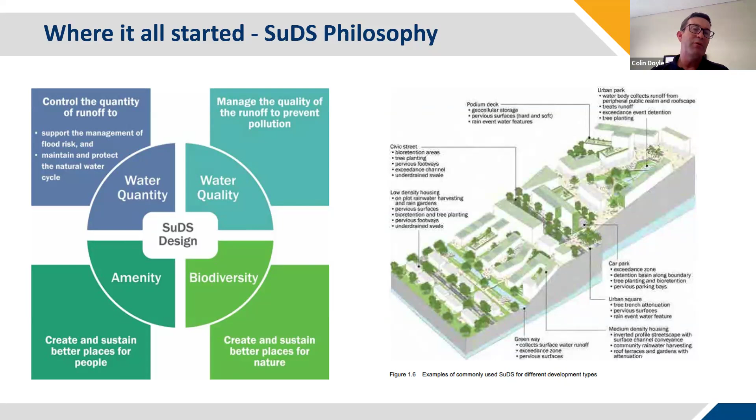With regard to Roadstone, basically we were in the concrete and stone business and tar macadam and lots of different basic building products. When it comes to stormwater products, which is something we have moved into since our sister company Hydro International came on board, the relevant sectors we are involved in really are the public sector with regard to schools, universities and social housing. And we've recently put a stormwater treatment product into UCD with BAM.

In residential housing developments, we see Hydro-Brakes and flow management products are very common. Private commercial, be they warehouses or retail parks, shopping centres and car parks, with regard to large scale attenuation and stormwater flow management products. We're doing a bit with regard to motorways and link roads and infrastructure, providing flow management products and Hydro-Brakes into a lot of infrastructure projects, and we see that increasing over the next couple of years as we get more and more into the market.

For Irish Rail, we have specified and priced our flow water treatment product into Irish Rail there recently. So we'll be hoping that comes and becomes a live project in the coming weeks. And water utilities as well, with regard to treatment works and water networks, etc. That's an area that we're beginning to move in.

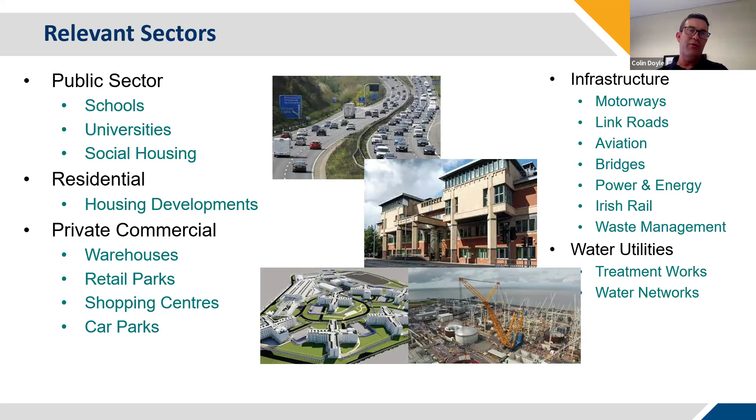And Brian will have a chat to you in the end about an upcoming seminar we'll have before Christmas, which will begin to deal with Roadstone's and Hydro's solution to stormwater management issues, as well as combined sewer overflows, flooding issues, etc. So that's what we'll be moving on to at year end with regard to our Christmas seminar.

So where Roadstone have been is that for the last 25 years, we've been in the permeable pavements business, be it permeable paving itself, or in the Duraflow permeable tarmacadam. We have done a lot of work with regard to permeable no fines concrete, mostly as an underlay material underneath Duraflow or underneath permeable paving, to increase the structural viability of the pavement.

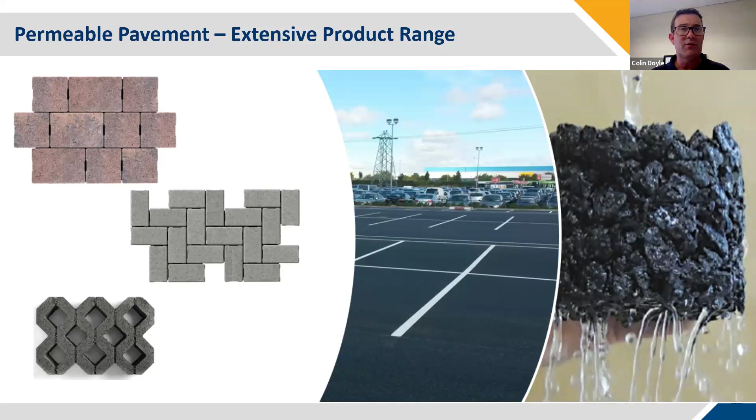So we have been involved in design of projects, and what we're looking at there is the car parking in the airport. That was a Duraflow product in the car parking spaces, where the standard driveways were a standard SMA product, stone mastic asphalt for hard wearing, but the actual parking spaces were themselves a Duraflow permeable tarmacadam product, and all the water is recycled for use in the airport. So there's a circular use of the water as it goes through.

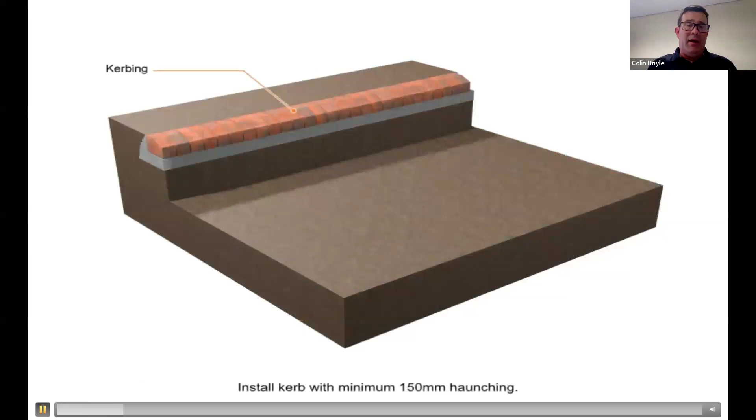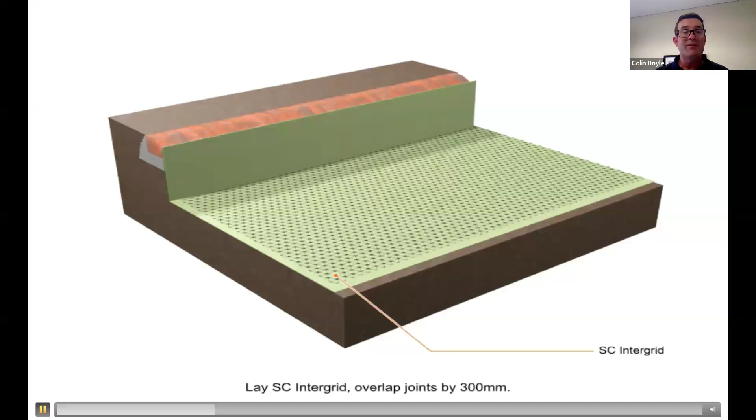So regarding permeable paving, we've been doing design permeable paving offerings for the last 20 years. Again, it's a very simple design. You excavate out the subgrade, you put in your curbing, then you put what we call an Inbitex geotextile on the bottom that provides a certain amount of treatment if water is going to ground. We have an SC Intergrid for flexural reinforcement within the stone body at the bottom, and this minimizes the depth you need to go to in order to get the support you need for the paving. So it minimizes dig, etc.

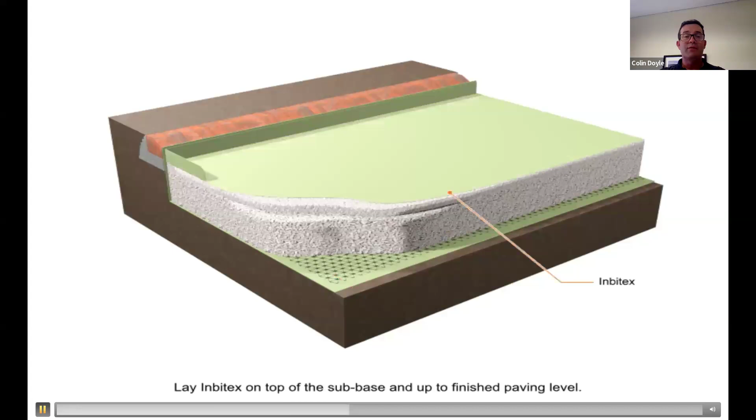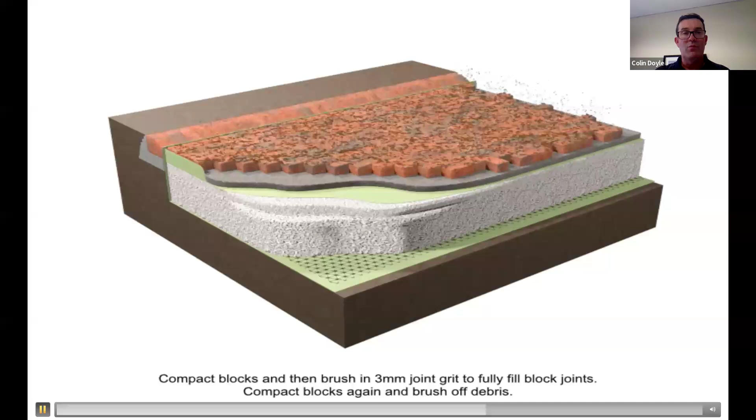Again, crushed no fines stone is in place, another layer of Inbitex, a laying grit, and then the paving themselves. So this has been designed and is becoming fairly much commonplace with regard to dealing with stormwater events with permeable paving. It can either go to ground or go for attenuation and delayed discharge, and then that offers our Hydro attenuation system, which bolts on to our permeable paving offering.

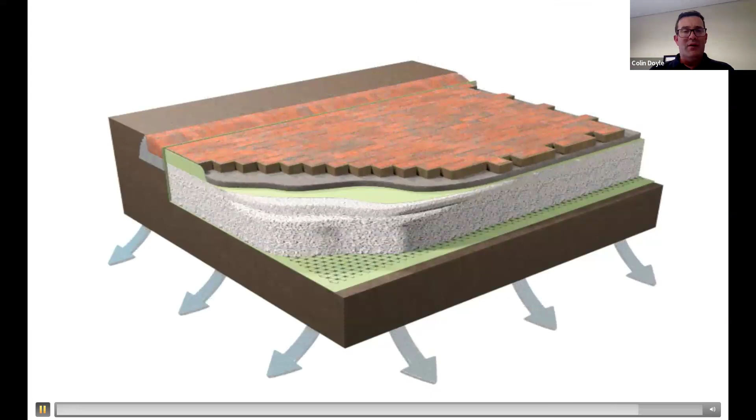But very little of our permeable paving is for ingress to ground. I'd say about 5% of what we do is ingress to ground. The rest is left for attenuation and delayed discharge. So we see just the general build-up. You can integrate rainwater harvesting into the systems as well, and then you can take roof water into the system as well.

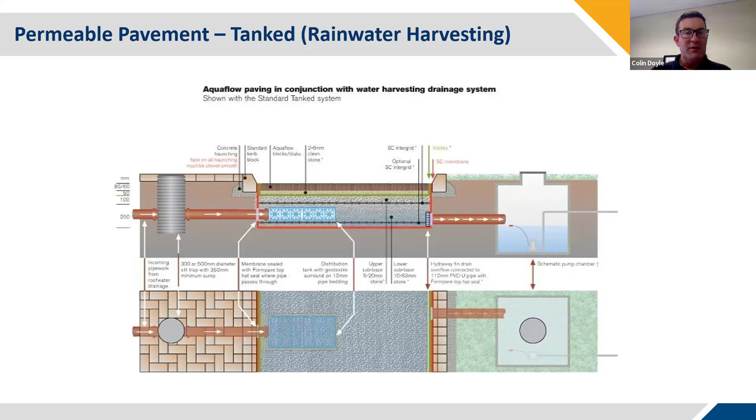Again, in Roadstone, we're a big believer in proper design, and we have services in place for design of all our systems, just to make sure that they work properly and that we minimize the amount of ground excavated and the amount of virgin material used in the products. So that's our permeable paving offering. I'm just going to hand you over to Phil, and Phil is going to talk through Hydro International and how they operate in the UK and here in Ireland over the last decades.

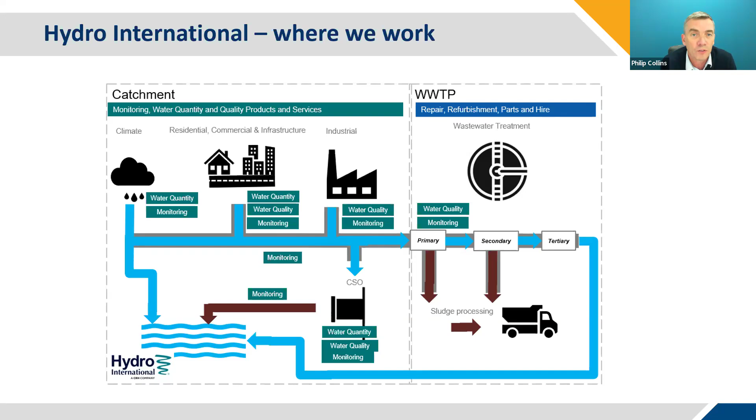Similarly, we apply the same engineering principles with regard to using hydrodynamic vortex separation at inlet works as we do for treating stormwater. And as Colin talked about, we have a rich heritage in dealing with CSOs, predominantly around screening of CSOs. So we have a range of technologies that we'll be talking about later this year. But we match the quantity aspect of controlling CSOs using our vortex technology. Next slide, please, Brian. So the solutions that we offer are fundamentally based on 3 core capabilities: slowing water down, taking things out of water, and understanding the water environment.

And the core 6 application areas that Brian will talk to in regard to the products relate to flood protection, stormwater management today. As I said, we're looking at having a session later in the year or before the year end around combined sewer treatment and flooding.

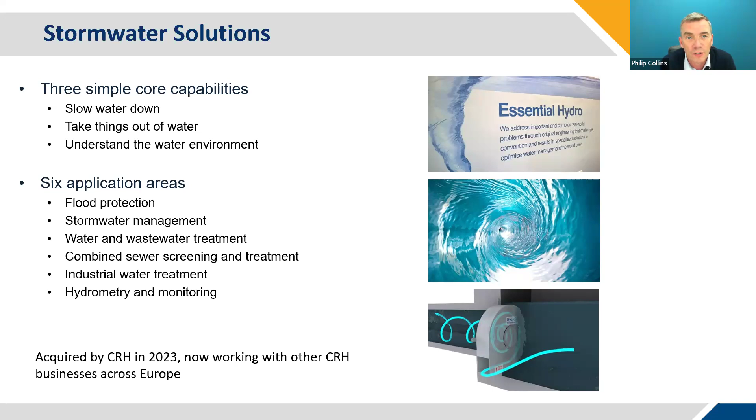What's really interesting for us in terms of the collaboration and partnership with Roadstone is bringing a holistic approach to the stormwater market in Ireland in terms of both quantity and quality, and we're looking to evolve that into how it relates to CSOs, and we'll talk more to that later in the year. So I'll hand over to Brian now, and he'll take you through the products, the stormwater products, in more detail.

Okay, thanks, Phil. So as the guys have said, the acquisition of Hydro is a great fit for CRH and for Roadstone. It's a good tie-in and follow-on from the permeable paving solutions that Roadstone's been offering for the last 20 years, as Colin has gone through. Obviously, with extreme weather and flood events becoming all too common a news story, planning conditions are becoming very onerous, with stricter water discharge conditions being applied.

So we're delighted to have the opportunity to be involved in designing and supplying solutions, working in conjunction with Hydro, design engineers, and of course on-site contractors, in an effort to reduce and hopefully eliminate the negative effects of these events. So I'll just go through, there's 2 kind of areas we'll cover.

Stormwater attenuation is the first one. That's broken up into flow control, where we look at the Hydro-Brake Optimum and the Hydro-Brake Flood. Then we'll cover attenuation and infiltration, so 2 systems there in terms of the crate system and arch or tunnel system. And then the second area is stormwater treatment, so 3 solutions there: the Downstream Defender, Up-Flo Filter, and the biofilter.

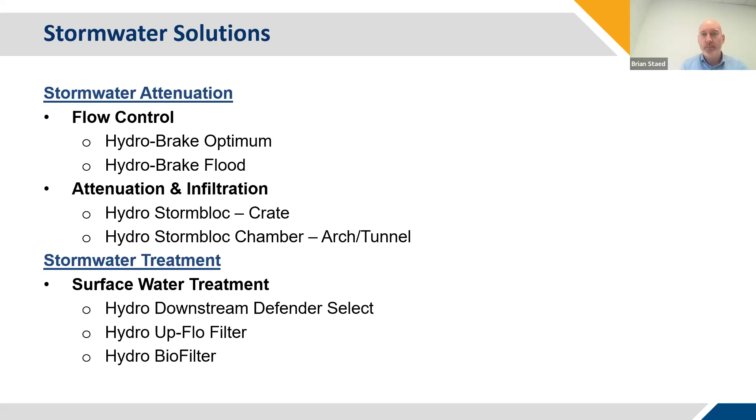So as Phil has said, Hydro have been around for over 40 years. They developed the UK's first vortex flow control device. It's the most widely specified flow control in the market. So the basics of it: a Hydro-Brake controls the flow of water into the sewer or watercourse, replacing old inefficient solutions such as orifice plates, restricting the flows downstream at agreed rates.

It then allows the slow release of temporarily backed up water at the same restricted rate, relieving pressure on sewer systems and reducing flood effects. The Hydro-Brake Optimum is adjustable by plus or minus 20%, so it's future-proofed for any change, maybe in planning conditions or design conditions. So it can be adjusted without having to replace the device.

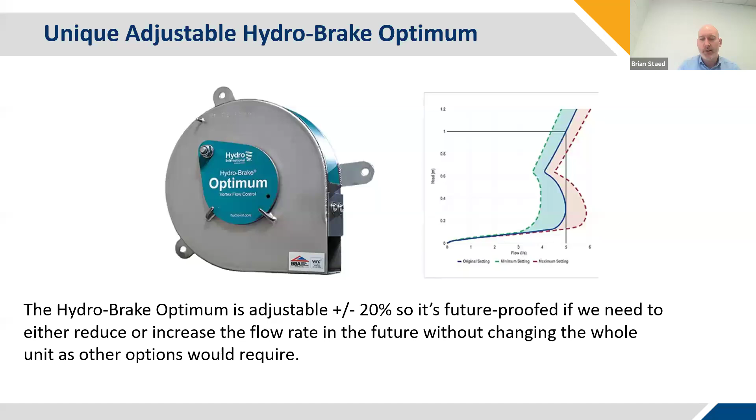The schematic there just demonstrates the flow of water through the unit. The characteristics of it: they can be designed up to a maximum flow of 550 litres per second, a max head of 4 meters, and an approximate storage area of 275 hectares. Now, those figures are based on an average of 2 litres per second per hectare.

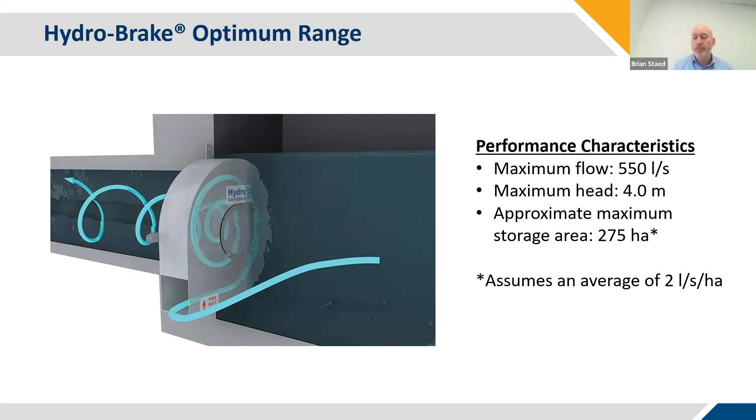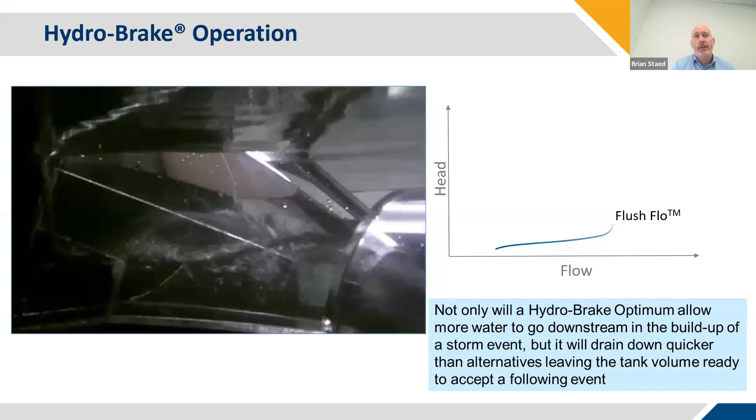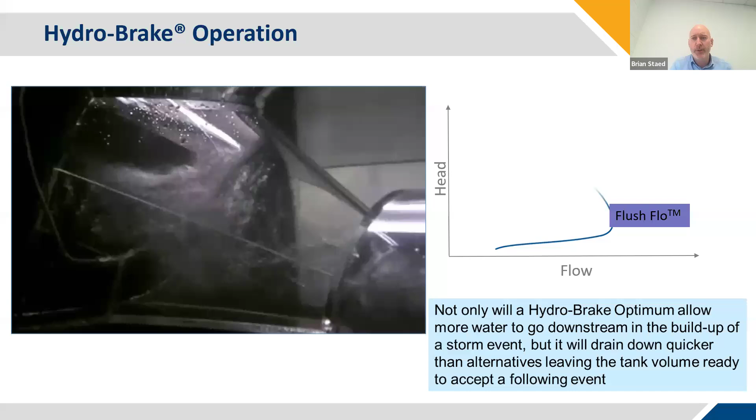So this video clip, while many of you would be used to seeing a Hydro-Brake, you may not have seen the water flow in action. So this is a sort of a transparent test unit. It shows what happens as the head of water increases in the chamber. The Hydro-Brake pulls air from downstream to create a core of air through the unit. That in turn restricts the flow going downstream. The core of air you see there is directly equivalent to the area of water that can't flow downstream.

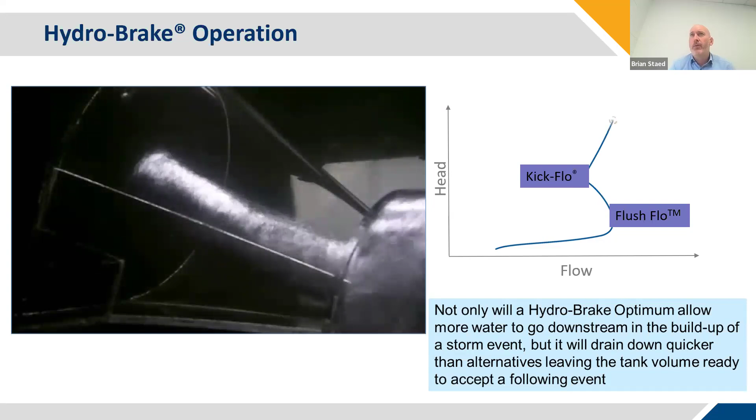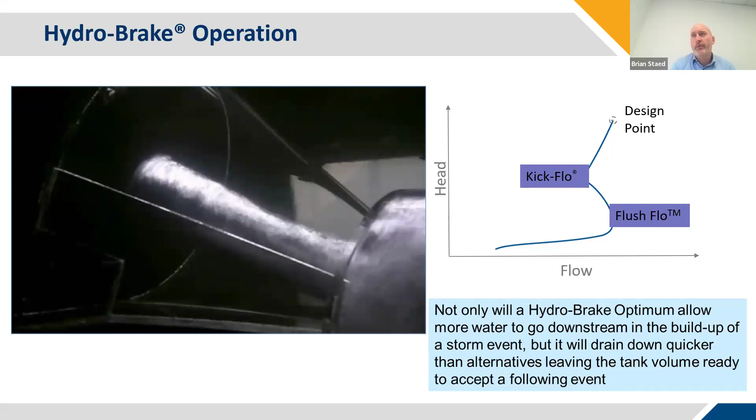And then when the storm passes, the water level drops and the unit again becomes just a large open orifice. And because the device isn't physically closed down, it can get more water off site during the early stages of the storm. You can see the schematic of the flow versus the head graph there. And it also drains down quicker, leaving the tank volume ready to accept another follow-on event.

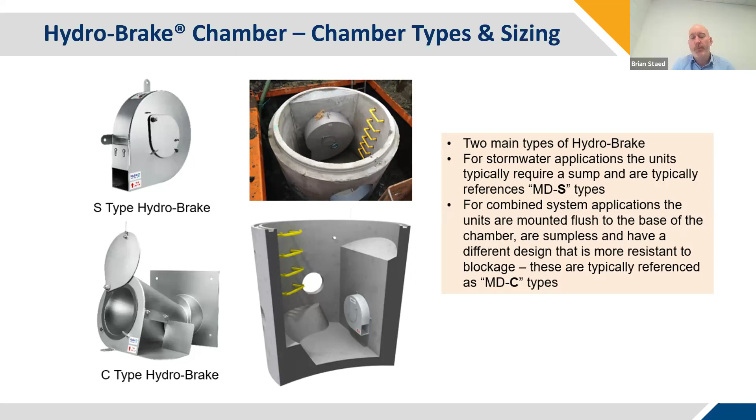That's just the Hydro-Brakes in situ. There's two types. The most typical one is the S-type Hydro-Brake. It requires a sump in the manhole. The other type is a C-type, which is a combined unit, which would be both sewer and stormwater, and it doesn't require a sump. And the design of that just prevents blockages.

So a larger version of that is the Hydro-Brake Flood. The Hydro-Brake Flood control provides consistent, reliable, large-scale flood protection at watercourse level, preventing costly damage and disruption to people, businesses, and essential infrastructure and services. It's typically installed in or adjacent to a designated attenuation area, such as an embanked field or whatever is designed as part of the flood relief scheme.

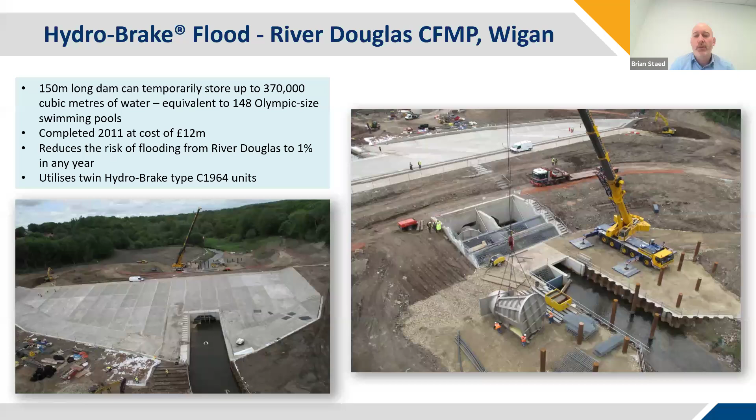Another similar project over there was in Glasgow, where they suffered years of flooding in and around the city, and once this project was put in place, it was a great success to both businesses and residents in the area, as it prevented further damage and even loss of life.

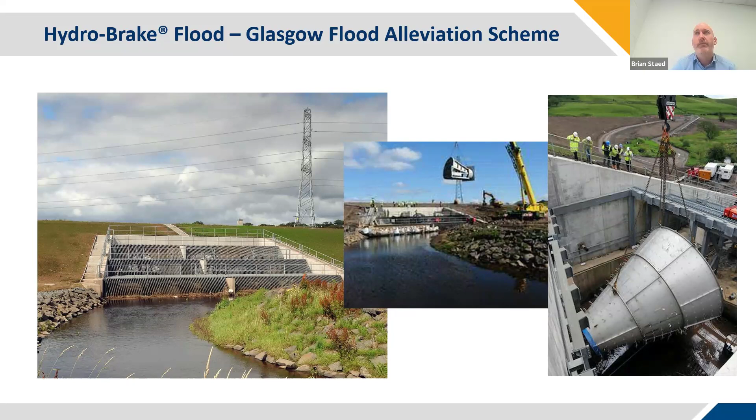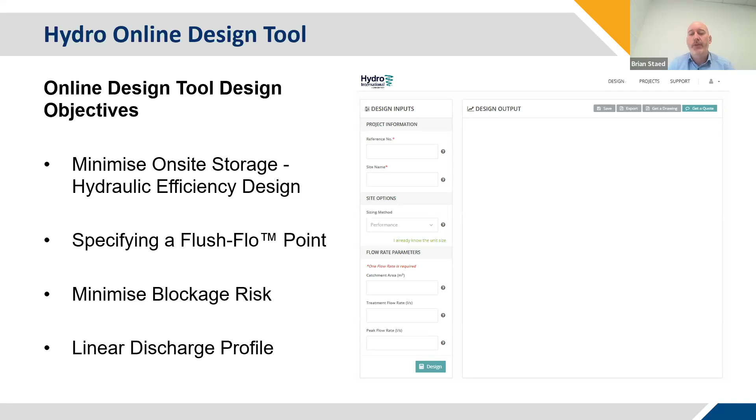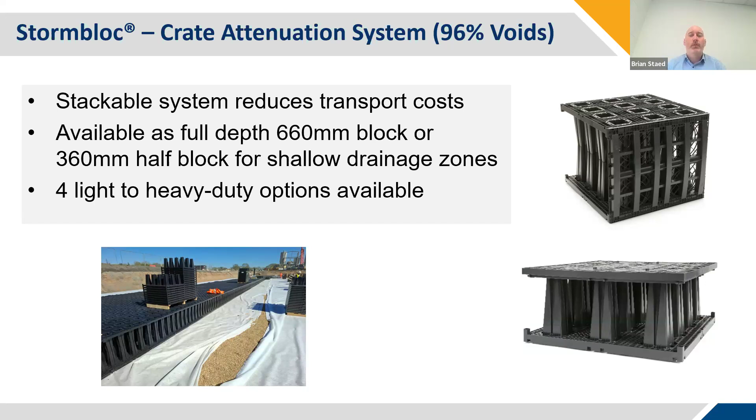Moving on then to the attenuation systems. The first one is the crate system. So this is a stackable system which reduces transport costs. It's available as a full depth 660 mil or a half block, which is 360 mil. There are 4 options available from light duty to heavy duty.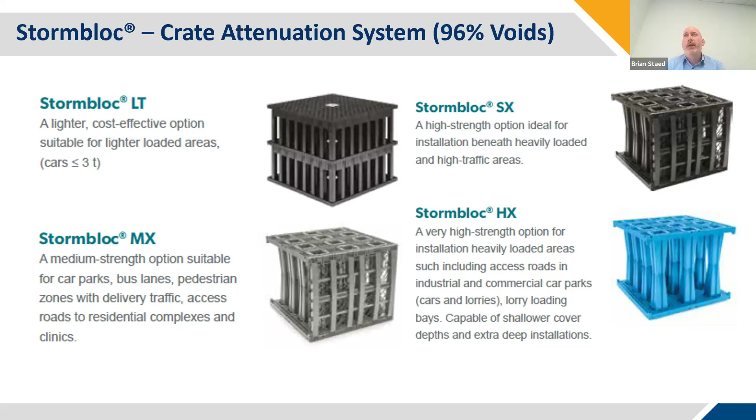Stormbloc LT is lighter, for cars and anything under 3 ton. Next one up is the MX, used in car parks, bus lanes, pedestrian zones, or light traffic. Moving on to the SX for heavier traffic, and then the HX, which is for very heavy traffic up to 60 tons.

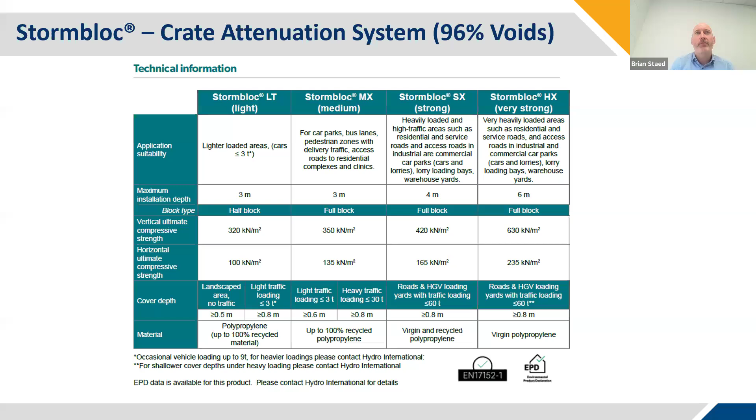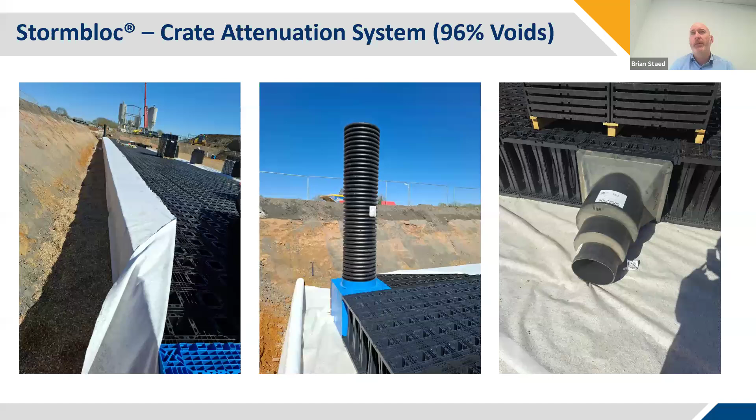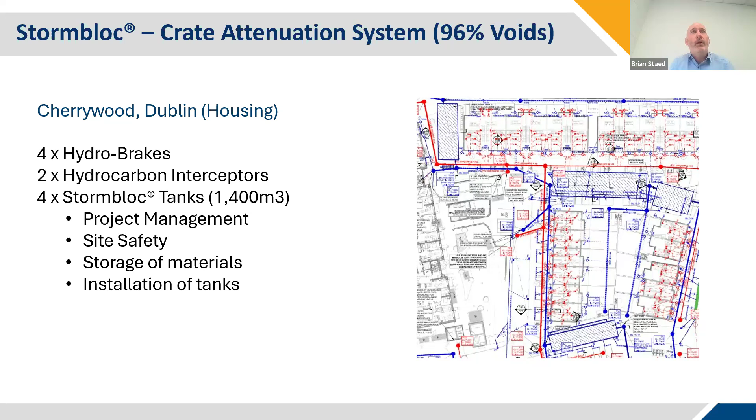So it's an ongoing project at the minute. It's a supply and install project by ourselves. So we work closely with their safety team as well on site to ensure everything is not just put in technically correctly, but also safely as well. So it's a service we would provide. There's also 4 Hydro-Brakes on it and 2 hydrocarbon interceptors.

The next attenuation system is a tunnel system. It's an alternative to the crate system. It does require a much larger footprint than the crate system. So a system like this would not have worked on the previous site, purely for space. The reason for that is while the tunnel itself offers 100% voids, the overall stone volume relies on the voids within the stone, which would be typically 30 to 40% depending on the stone used. So it's a long way off the 96% you get with the crate system. So that's the reason for requiring a much larger dig.

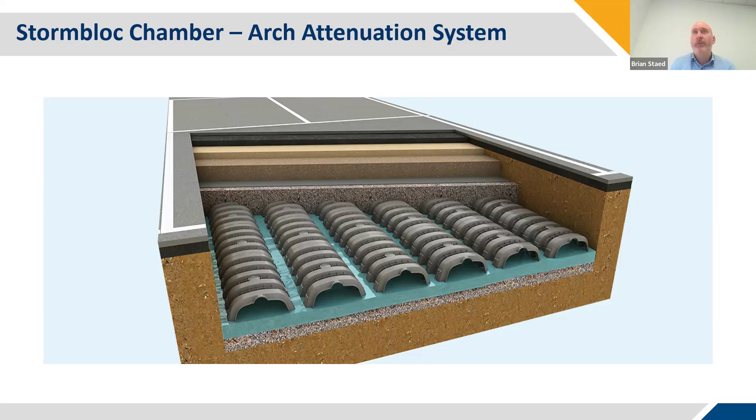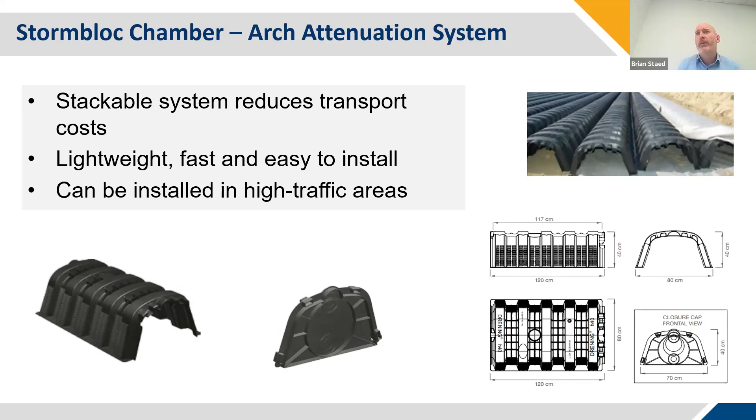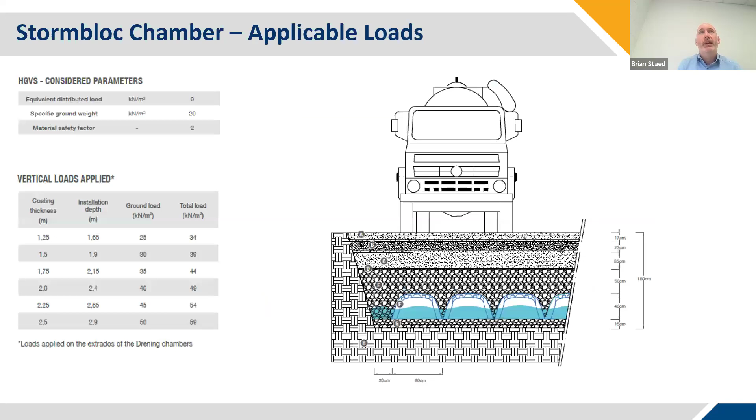Again, the system is a stackable system similar to the crate system, lightweight, fast and easy to install, and can be installed in high traffic areas as well as pedestrian areas. They're just typical dimensions of a typical unit there with its end plate. Again, these are just various designs that are available depending on the requirement, so light to medium to heavy duty or heavy loading. And then there's different layout options available depending on site requirements.

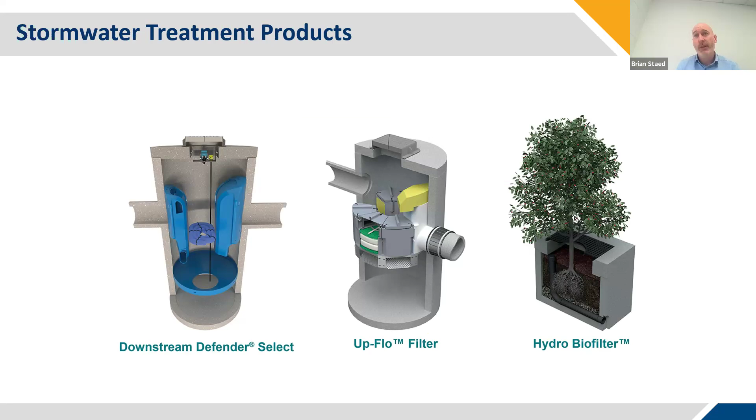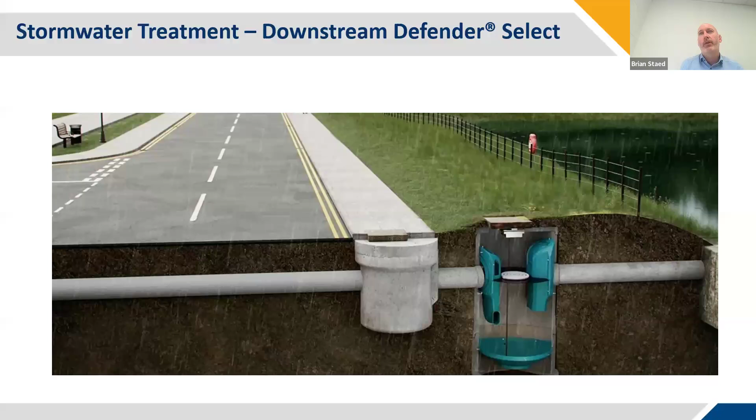So moving on then to stormwater treatment products or solutions. We look at 3 solutions here: the Downstream Defender, the Up-Flo Filter, and the biofilter. That's just a typical animation of how a Defender might be placed treating runoff water from a roadside.

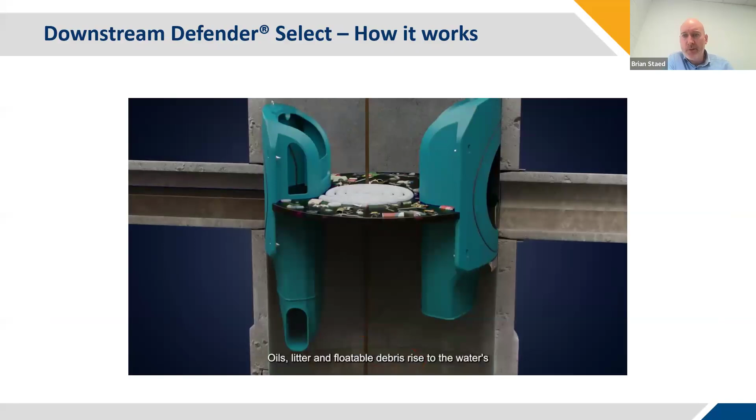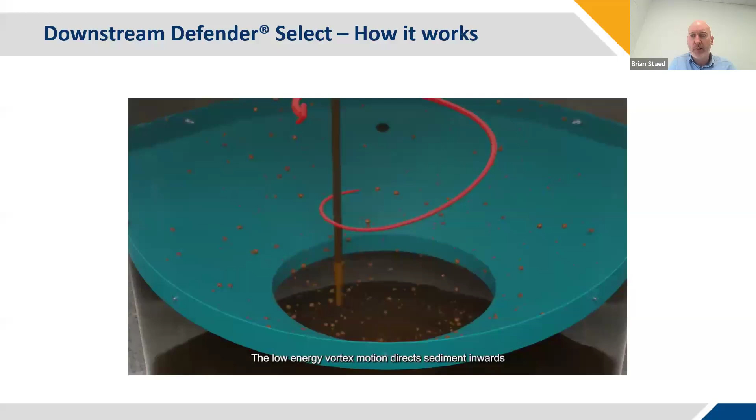So the Downstream Defender is a high efficiency dynamic separator working on a vortex principle. Solids are directed down into the sump and floating debris directed to the top of the unit where it is detained. The essential difference between this solution and a simple silt trap is in its very high resistance to washout and the sediments being disturbed by a high flow and re-entrained. This is why the concept has been so widely used to protect sensitive habitats. We've installed numerous units around the country, such as with Clonmel Enterprises in Adamstown and at UCD, as Colin mentioned earlier.

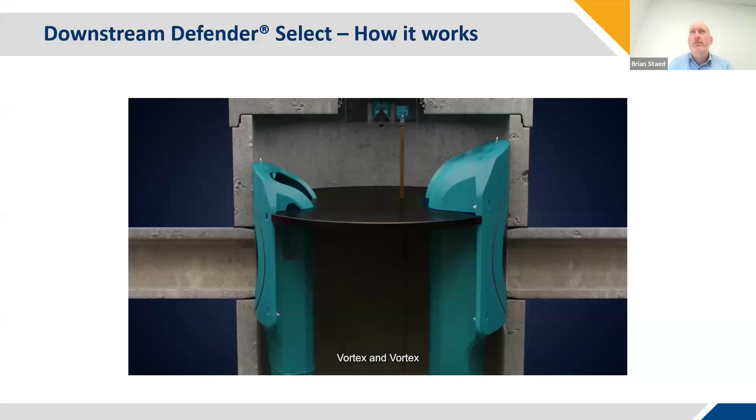The downstream defender is also available in 2 options. So you can get it in a concrete chamber or in a plastic chamber, again depending on site requirements.

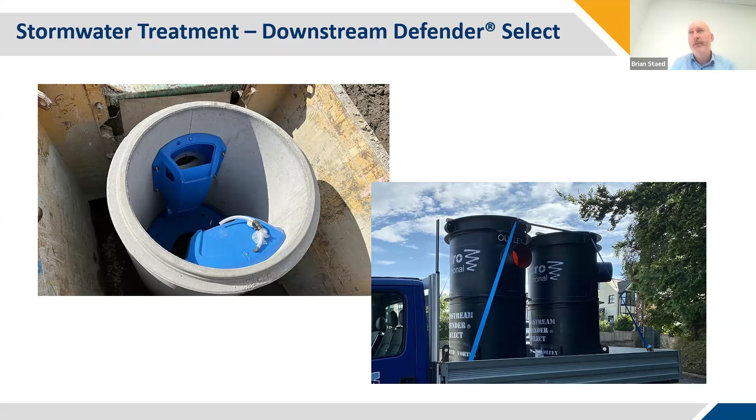So in terms of the downstream defender and the simple index approach, the simple index approach outlined in the SUDS manual is a water quality design method for sites with a low to medium risk pollution hazard level. Pollution hazard indices are assigned to a given land use for 3 pollutant groups, which are total suspended solids, metals, and hydrocarbons. SUDS components are selected until the combined pollution mitigation index score is greater than the pollution hazard for each pollution group.

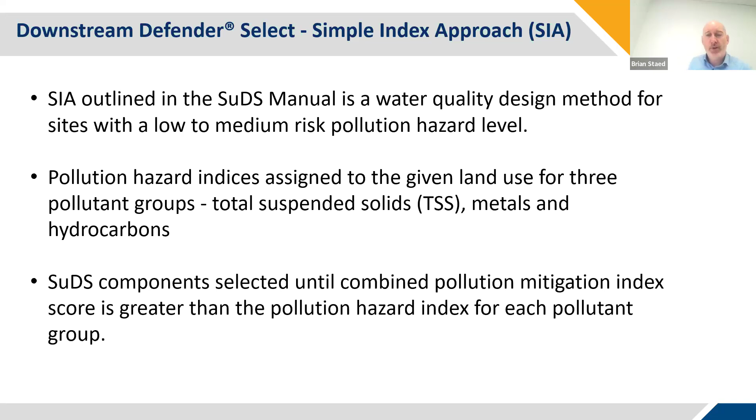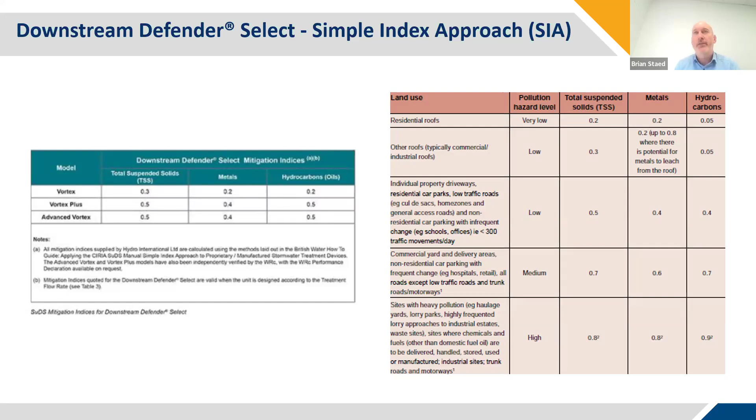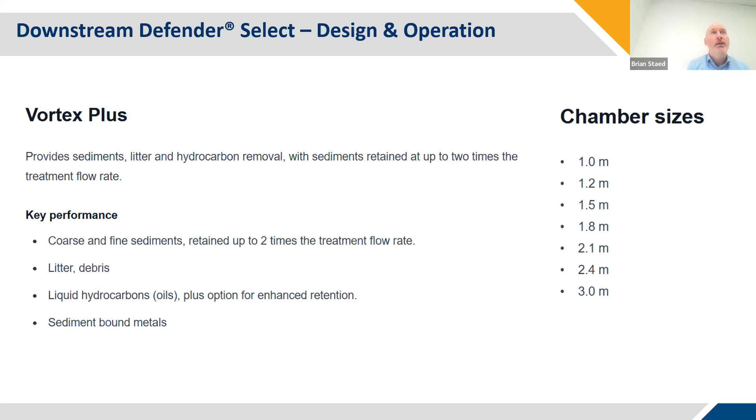And in terms of, again, just to cover what it can do, the downstream defender will remove coarse and fine sediments, litter, debris, liquid hydrocarbons with an extra enhanced retention option, and a certain amount of sediment-bound metals.

Again, the design tool, there's a section there for designing the downstream defender. You can input your sizing method, catchment area, treatment flow rate, and peak flow rate, and it will give you a product out the other end. And basically, between ourselves and Hydro, we take it from there and come up with a final solution that we ensure works for what the customer is looking for.

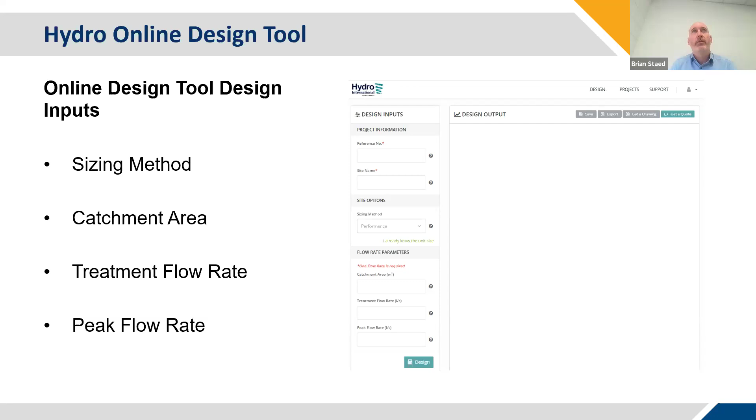The next product is the Up-Flo Filter. The Up-Flo Filter comes in various combinations. Again, it's a manhole type product. It's an advanced stormwater treatment system that combines sedimentation and screening with filtration to deliver exceptional surface water pollution removal. It's verified to remove 80% of total suspended solids, but it has a demonstrated removal rate of up to 98%.

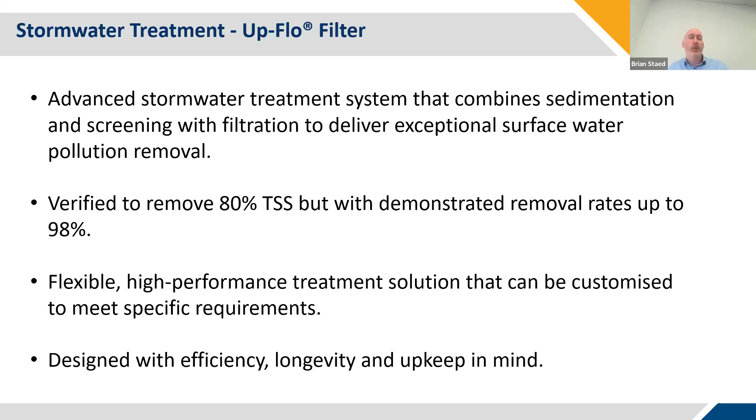It's a flexible, high-performance treatment solution that can be customized to meet specific requirements. And like all Hydro products, it's designed with efficiency, longevity, and upkeep in mind. The targeted pollutants for this, again, are very fine particles, trash and floatables, and liquid and sediment-bound hydrocarbons, and it will also remove sediment-bound heavy metals and sediment-bound nutrients. And it's suited to a wide range of sites.

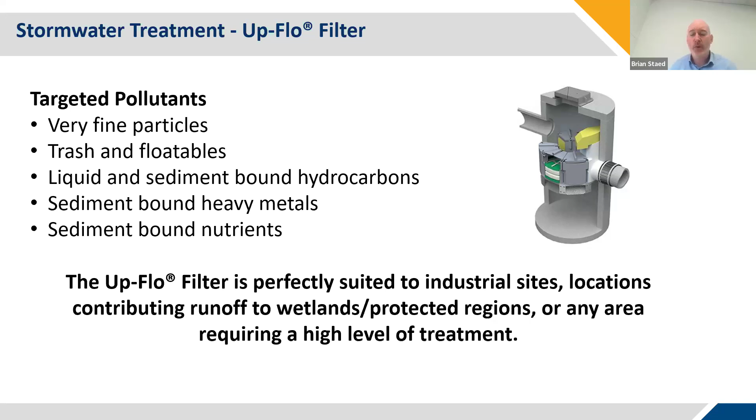Third and final product is the biofilter, or the Hydro biofilter, which is an aesthetic-looking product. It removes similar pollutants to the Up-Flo Filter. Again, large and very fine particles, dissolved, liquid and sediment-bound hydrocarbons, gross pollutants, heavy metals, and nutrients. It is essentially a tree in a box, and the type of planting or tree that goes in the box is locally decided and will fit in with the local environment.

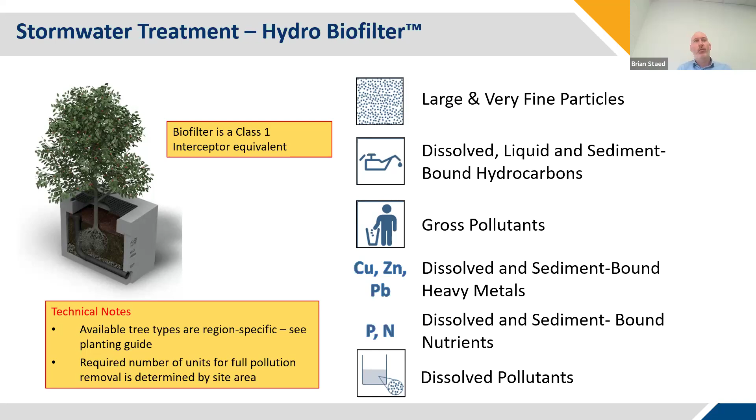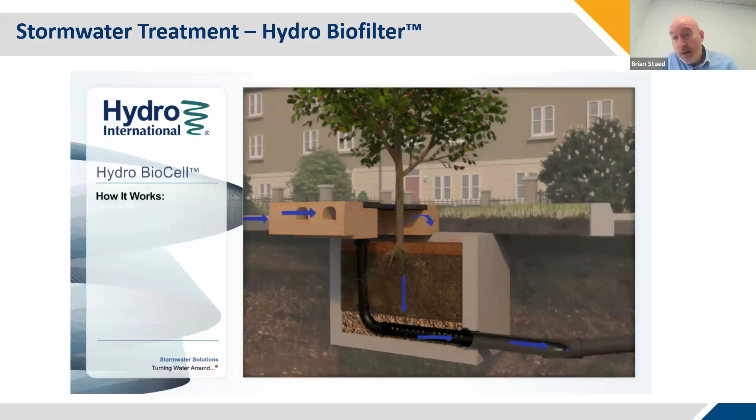This is just a little animation that demonstrates how it works in terms of flow and treatment. So as it does, there are various simultaneous actions happening, including filtration, ion exchange, bioremediation, and phytoremediation. And as you know, very clean water reaches the base of the unit. It exits via perforated pipes and can be introduced or reintroduced safely into the environment. So it's a niche type of product.

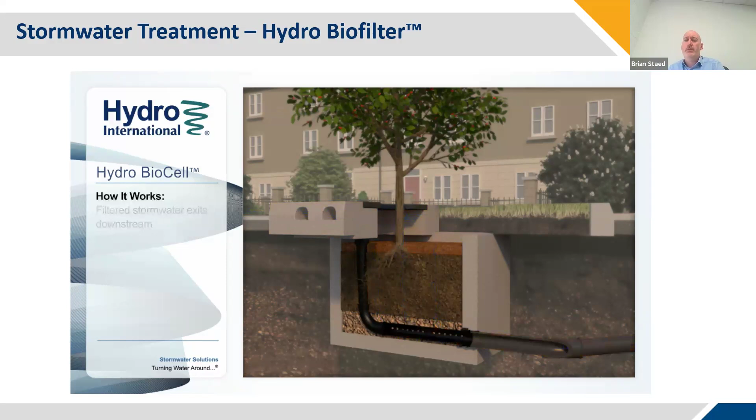So in summary, the downstream defender is a vortex dynamic separator that removes coarse and fine particles, liquid and sediment-bound hydrocarbons, and gross pollutants. The next two products are the same, with the added removal of heavy metals and nutrients.

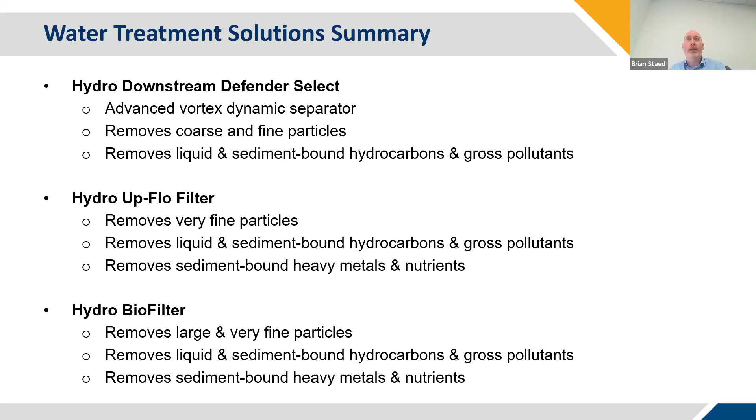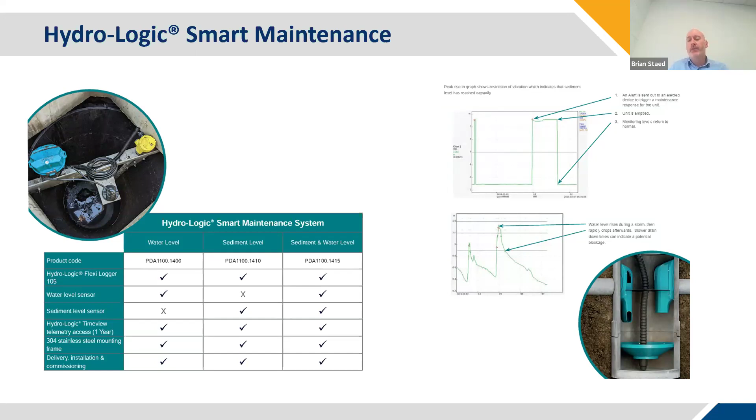Just something there as we went by, the Hydro-Brake Flood. Brian looked at projects in the UK there, but we have a project ongoing in Kilkenny at the minute regarding flooding, looking at a Hydro-Brake Flood. So there are live projects in Ireland with that product, and I think it's so important to say that these are all passive solutions. Obviously a Hydro-Brake Flood is a big civils product.

It's a passive solution to an issue that's raised in areas or towns that were prone to flooding. Being a Carlow person myself, I was well aware of flooding in the 80s and 90s, but the good news is we solved our problem now, and it's down the river in Graignamanagh now. So that's what we're looking at now. But these are passive solutions, and they are issues that are live in Ireland. Again, we showed a few in the UK.

The Hydro-Brake Flood is a solution to a flooding issue. It doesn't stop flooding happening, but it allows you to control where the flooding happens, into a greenfield area rather than into town centres, affecting businesses and commerce, and homes and people's lives, etc.